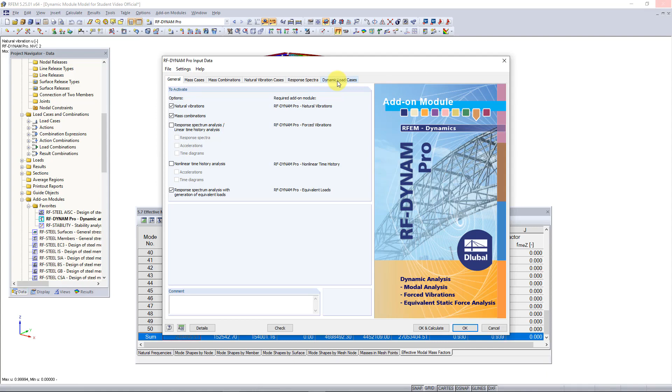We can activate the add-on module response spectrum analysis with generation of equivalent loads. So once I activate it, you'll see that at the top here we will get two new tabs. One is for the response spectra we need to generate based off the standard, and the other one is to generate our dynamic load cases and create our equivalent loads. So let's first go into the response spectra tab.

And this is where we want to generate our response spectra, and you can see that we can do this according to a standard. Right now you can see we have a long list of standards. So the first thing we need to do is select the standard we would like to generate this response spectra from. So I'll choose the ASCE 7-16 for this example, but you can choose from any of the other standards as well.

You can also see we have the choice to create these parameters based on user-defined info, if you would like to just enter your acceleration and period manually, like this. Now we just need to enter our parameters with regards to the location of the structure. What we can do is use the GeoZone tool on our website to find these parameters. I already did this, and I assume that the structure is located in Philadelphia, Pennsylvania, in the United States. The ground motion parameters we need to enter here are what we recorded from the GeoZone tool.

So we need to enter the site class, and this is determined from the standard. Then we need to enter the response acceleration parameter for short periods, which in our case, for this location, is 20% of g. Then we need to enter the response acceleration parameter for 1 second periods, which is 6% for this location. And the last parameter we need to enter is the long period transition period, T sub L, and for this location it is 6 seconds. The rest of these parameters will all be generated automatically.

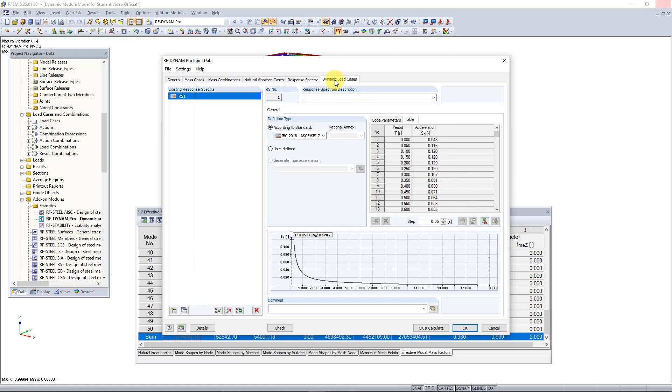So here you'll notice that the only option given to me under this tab is the equivalent static force analysis. This is because I only activated this dynamic module under the general tab. All of these other options have more to do with other add-on modules like time history, for example. We do also need to solve for our one natural vibrations case, which we have automatically selected here.

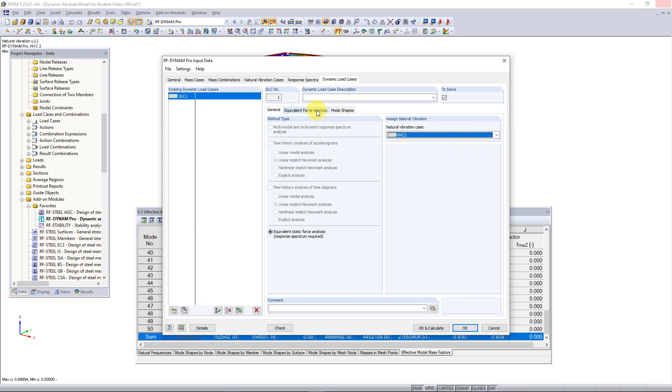And then the next thing we need to do is go under the equivalent force analysis tab here to tell the program which directions we need to excite the structure, for example. For this video, I'm only concerned with the two orthogonal directions x and y, so I will activate those.

If I was concerned, again, with vertical seismic, then of course I would activate z as well.

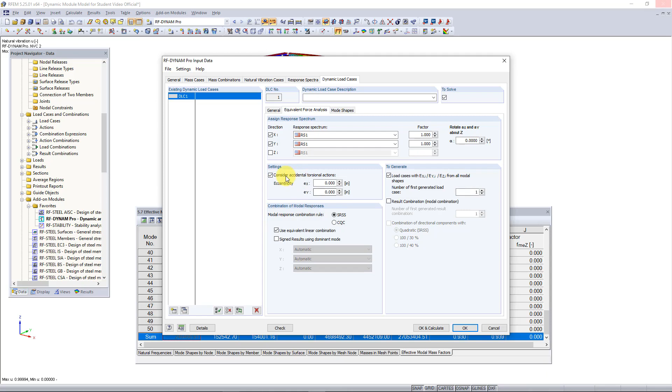The next info we need to enter according to the ASCE 7-16 is the eccentricities for accidental torsion. And how we do this is we set 5% of the structure's dimensions perpendicular to the direction of the applied forces. So if I activate this in the x direction, we just need to choose 5% of the total length in the x direction of the structure. And I already calculated this value, and it came out to be 16.560 inches in the x direction, the global x direction.

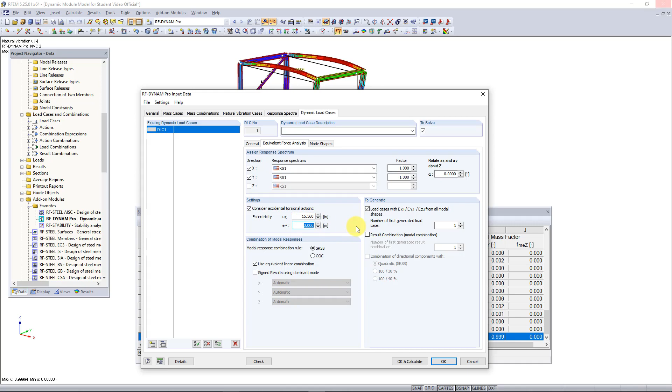And then now in a similar manner, we need to have the eccentricity in the y, and we can compare that to the direction in the y of the short direction of our structure, and 5% of that dimension is 12 inches. So we can enter that. And now the program's smart enough to know to multiply the forces in the x and y directions to these eccentricities to create our accidental torsion.

Now what we need to do is choose the combination rule for our modal responses. This is how the program combines all of the load cases created from the equivalent seismic forces in each direction into an envelope solution. So there's the two options here, the square root sum of the squares, or SRSS rule, or the complete quadratic combination rule, or the CQC rule. The main difference between these two rules, just to sum them up quickly, is that the SRSS rule does not take damping into consideration, whereas the CQC rule does take damping into consideration.

For this tutorial, we can set the rule to the CQC rule, just so we can see how damping works, and you can then see that this activates the damping tab up at the top here. We then can also activate our load cases over on the right here. So they're already automatically activated. And then we need to also activate our result combinations, which is where the load cases will be combined according to our modal response combination rule.

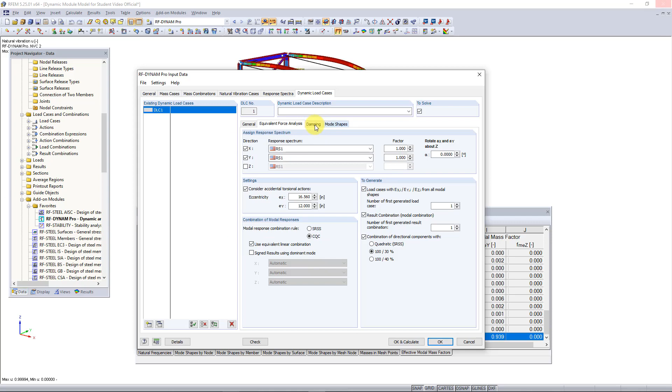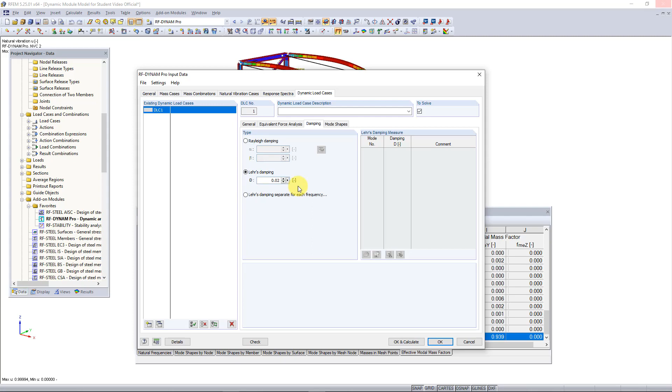So then we can move on to the damping tab. And like I said before, if you use the CQC rule, then you have to consider damping, or else there isn't much difference between the CQC and SRSS rules. So in this tab, you can either enter Rayleigh damping coefficients, or we can use Lehr's damping, which is, for example, around maybe 0.02 for a steel structure. So we will just assume this value for this example.

Now in the last tab, mode shapes, the program wants to use all calculated eigenvalues to create equivalent loads. This really isn't necessary in this case because we just want to use 90% of the structure's mass participation. So what we can do is, instead of selecting all of our equivalent loads here, we can choose this option, deselect modes with, and we can enter the value 0.005 or 0.5%. And so what this will do is it will deselect all mode shapes that have less than 0.5% mass participation. And this basically will help us with reducing our results and just creating a cleaner analysis.

And you can still see here, even with deselecting those modes, that we were meeting our 90% mass participation in both the X and Y directions. So the last thing we need to do now is just hit OK and calculate. And so this is the end of this video, and in the next one, I will go through these results and explain how to view and understand them.